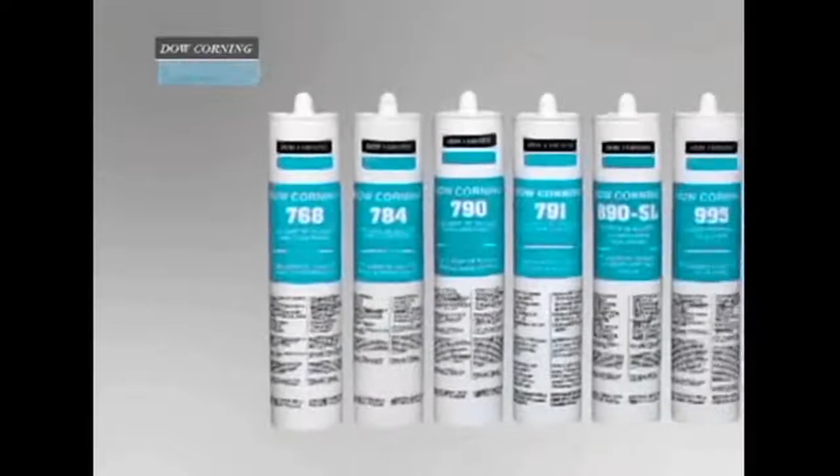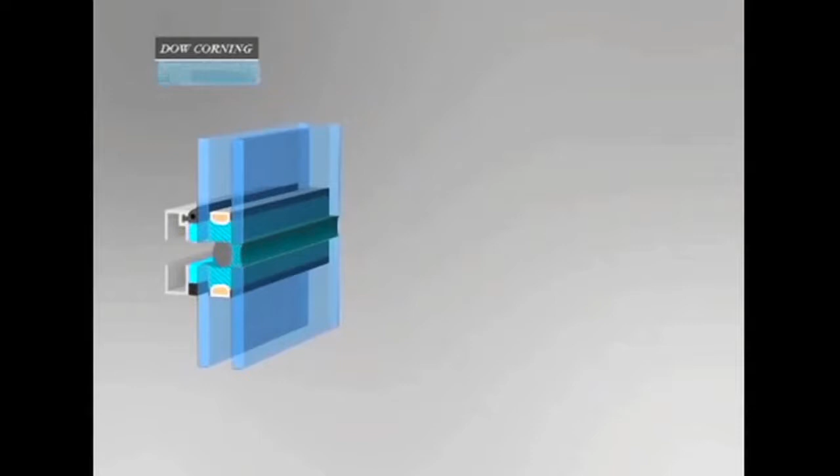Apart from structural silicone, Dow Corning provides an entire range of sealants for many applications. In the construction building industry, sealants for structural glazing or metal panels are the most modern trend, enabling safe and aesthetically pleasing architectural solutions. Dow Corning has therefore created a systematic approach based on domestic and international standards for structural glazing systems.

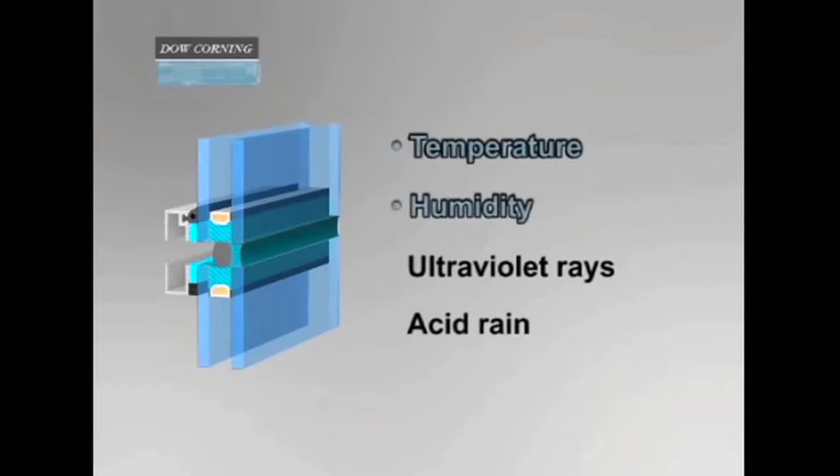Structural silicone sealants must be able to withstand all possible panel movements. They must also be weatherproof.

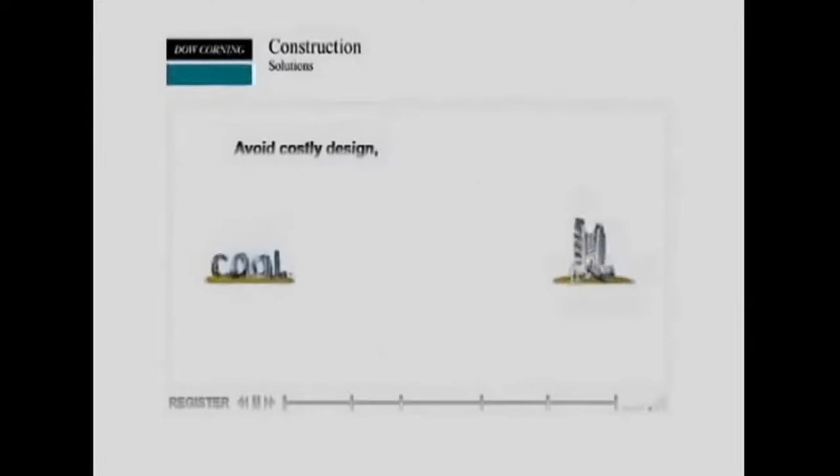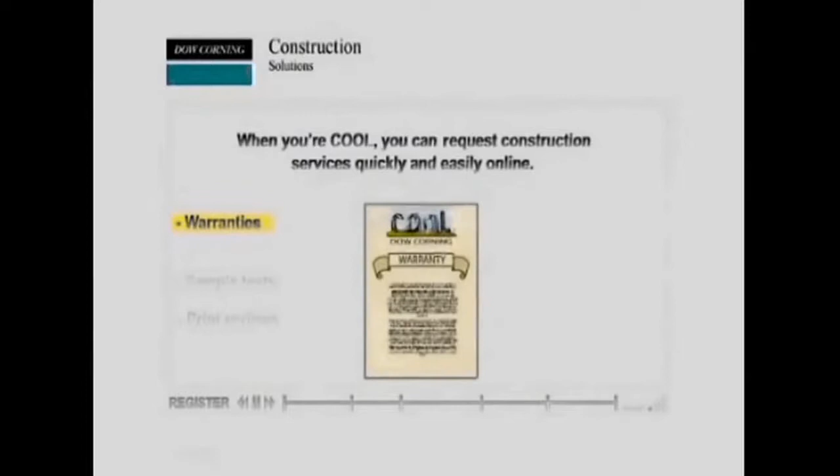Dow Corning, as we continue to innovate, has created COOL, a tool that brings together our global support services and makes sure that each customer interaction with Dow Corning is unique. This innovative internet tool simplifies project management, when possible, making it quick and easy to perform revisions, request sample tests, and warranties.

The first step in the process is to calculate the dimensions of the structural silicone sealant joint by keying information into COOL.

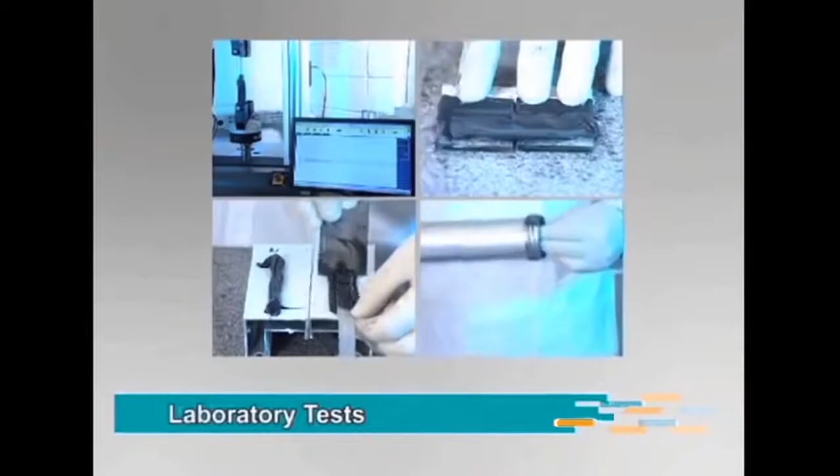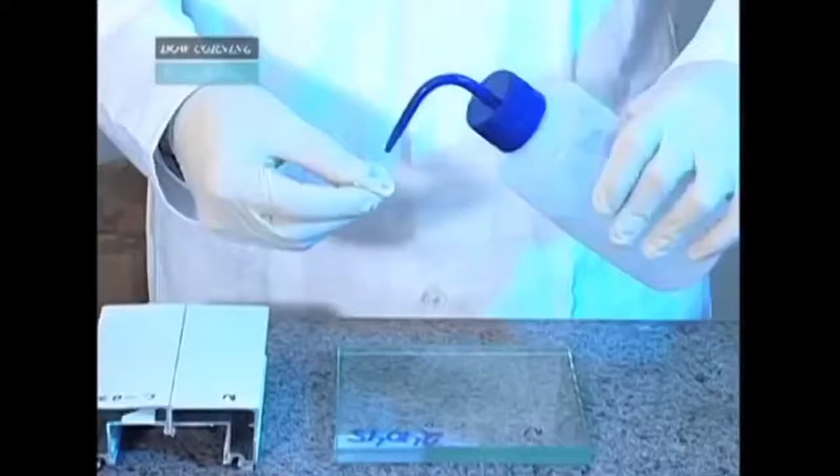The next step is to perform laboratory tests. 3 samples of each type of material to be used on the building must be supplied. The samples must be sent directly to the laboratory after being registered in COOL.

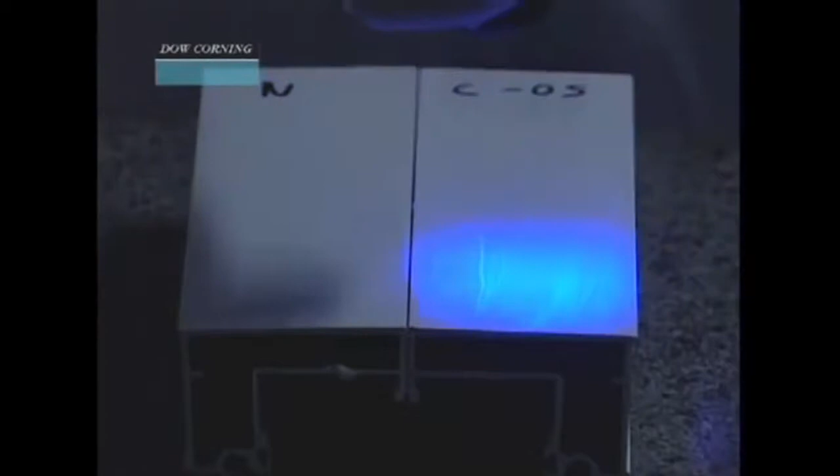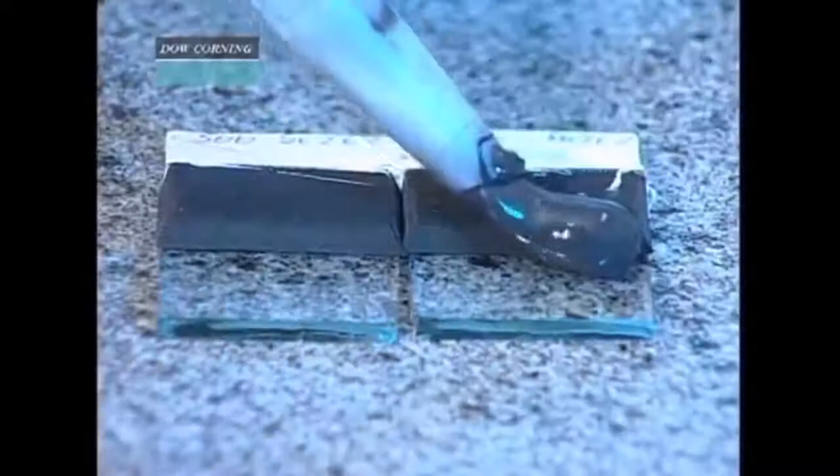Dow Corning evaluates the adhesion of the sealants using a peel adhesion test. This test will identify the best solvent for cleaning each substrate and whether a primer needs to be used. The test takes 3 weeks to complete once the samples have been received per industry standards.

Another test performed is for compatibility. Chemically incompatible glazing accessories may cause discoloration of the sealant and/or loss of adhesion to the substrate. This test takes 4 weeks to complete once the samples have been received per industry standards.

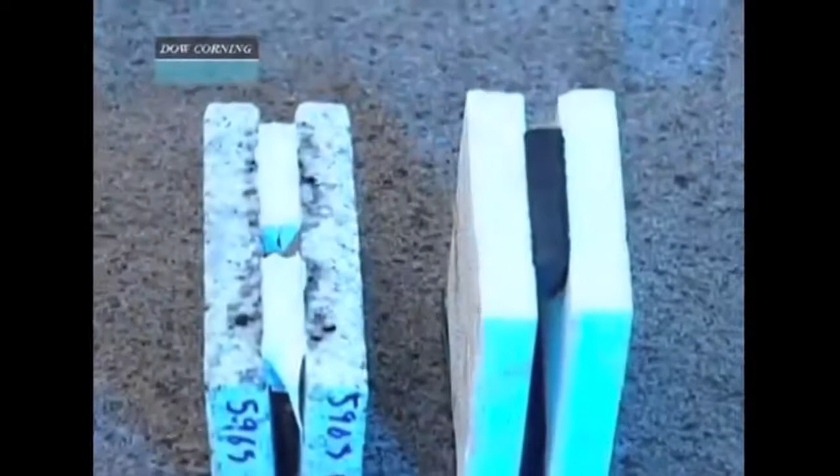If natural stone is used in the project, Dow Corning may test and evaluate the performance of its sealants to determine whether the sealant fluid can migrate into these substrates. This test takes 6 weeks to complete once the samples have been received per industry standards.

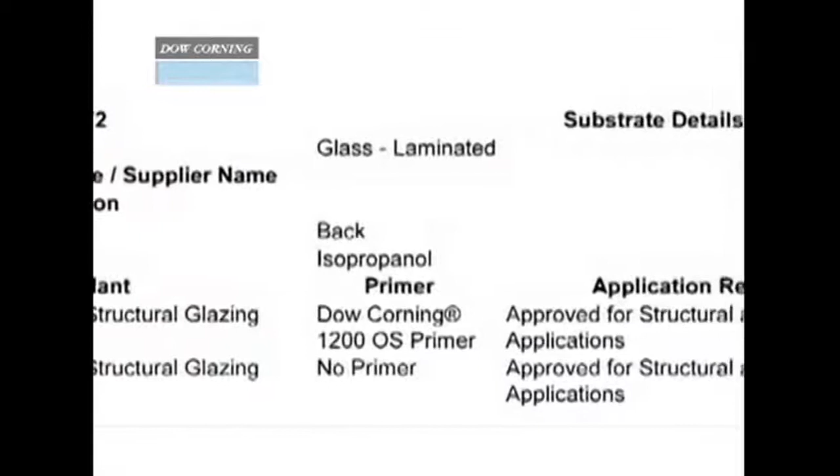Once the tests have been completed and the results delivered, the customer may begin the phase of applying the structural sealant. Important point: glazing may only begin after delivery of the Dow Corning report containing all the completed test results.

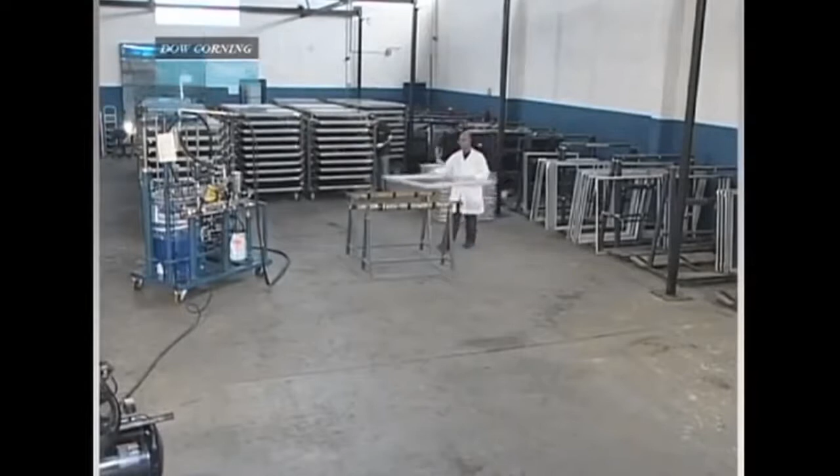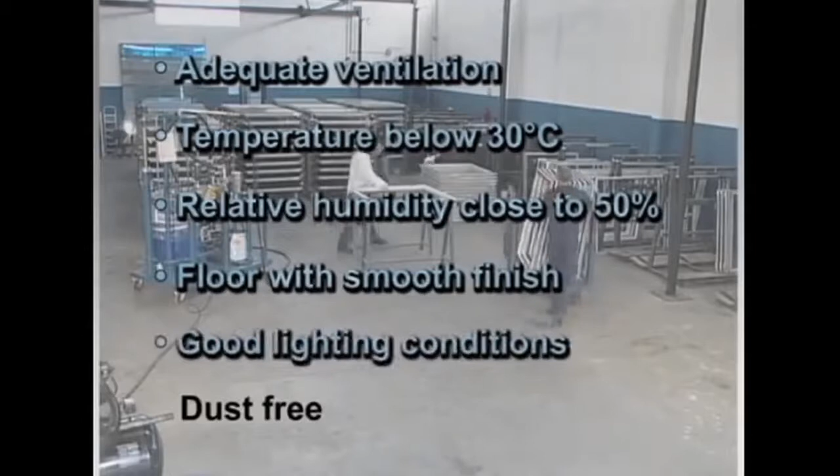Read the product safety sheet before beginning application of the structural sealant. It contains all the necessary procedures, personal protective equipment, and storage conditions for the products to ensure safe work. The location where structural glazing is to be performed must be reserved for the application of silicone.

To begin the process of applying structural sealant, the first step is to clean the aluminum frame with the solvent indicated in the laboratory test result report, using a 2-cloth cleaning method.

If a primer is needed, apply after cleaning. The primer must be applied evenly and sparingly, covering the entire perimeter of the substrate, and you must wait 30 minutes for the surface to be ready for sealant application.

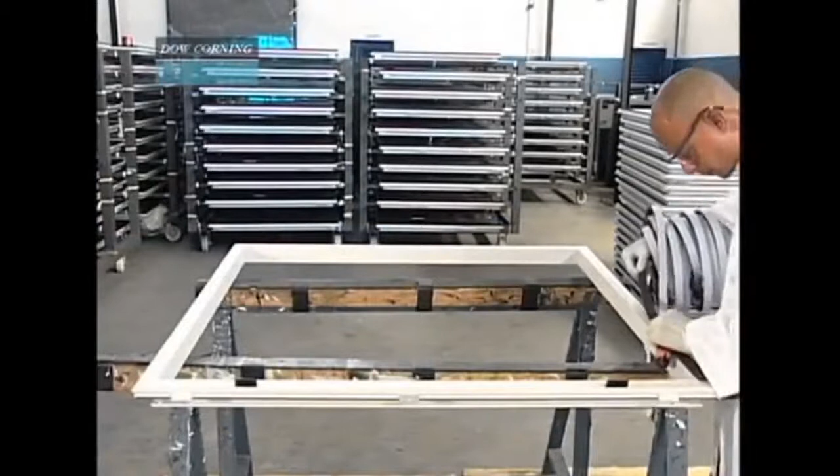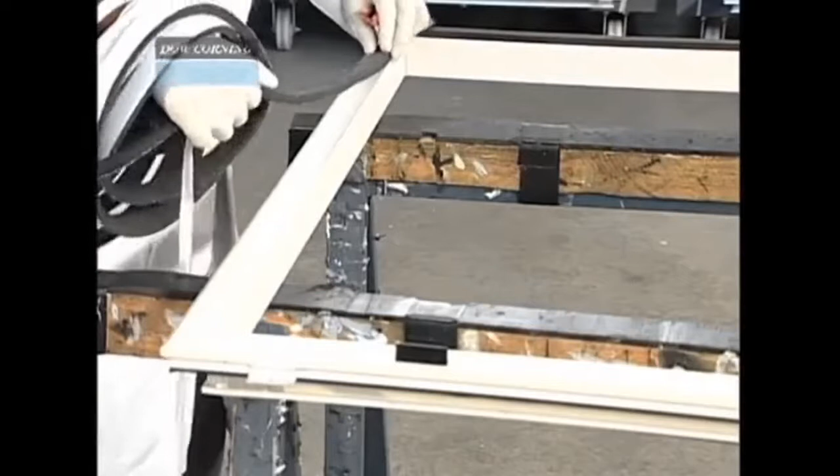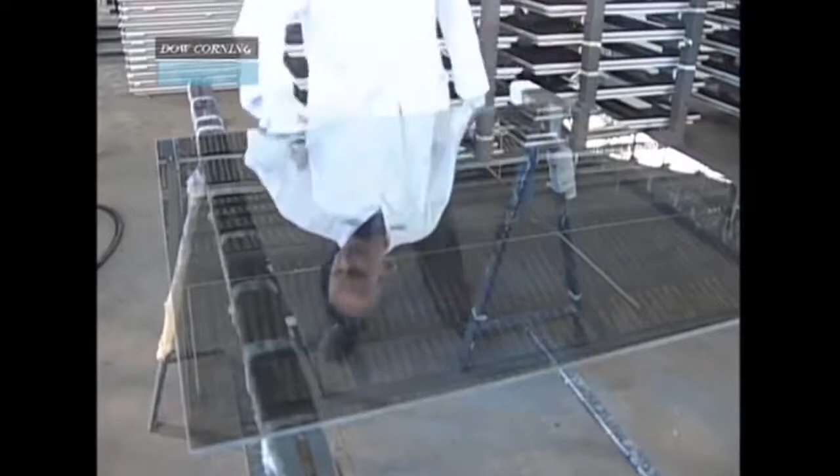Next, place polyethylene spacers or gaskets on the entire surface of the frame in order to support the glass and define the area of the structural silicone joint. This spacer may be mono or bi-adhesive, provided it is made of a material that has previously been tested and approved by Dow Corning. Once the spacer has been applied, the glass must be cleaned using the solvent indicated in the laboratory test result report, applying it with a lint-free cloth.

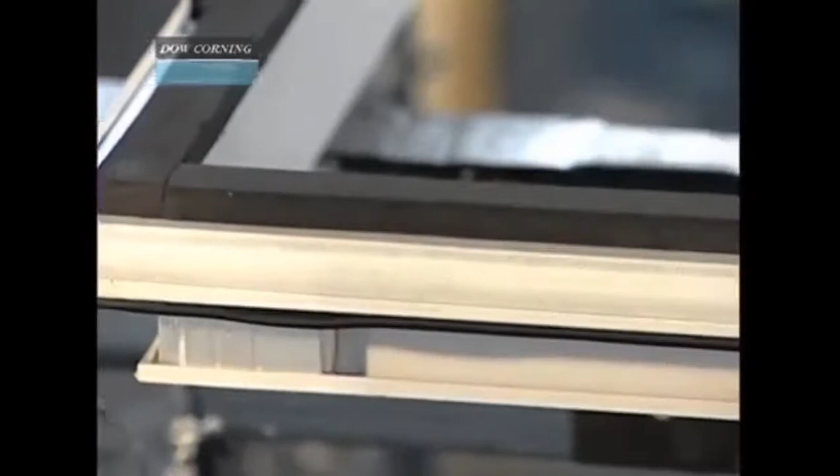Cleaning must be very thorough to remove all residues. Following this step, and before the solvent evaporates, wipe with a clean, dry cloth to make sure excess solvent is removed.

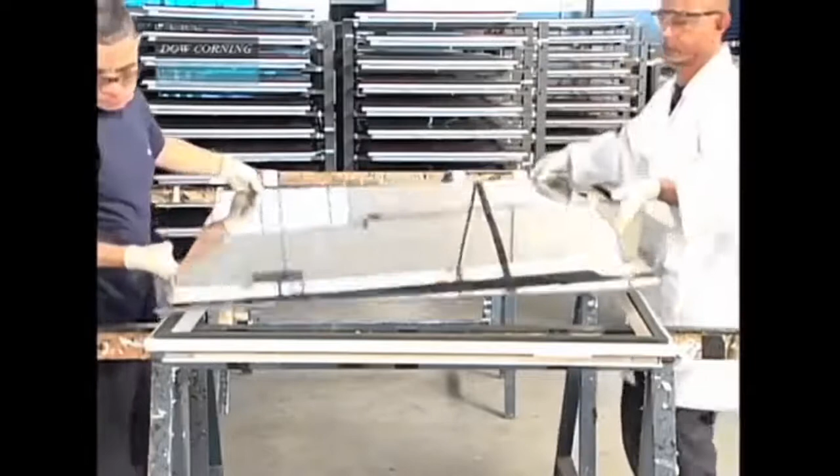Use masking tape to protect the area lying next to the location to be filled with structural silicone. Any excess silicone will be spread on top of the masking tape rather than on the aluminum.

After the substrates have been prepared, the glass can be rested upon the aluminum frame. Precision is fundamental in this step because the glass and aluminum must be perfectly aligned in the frame.

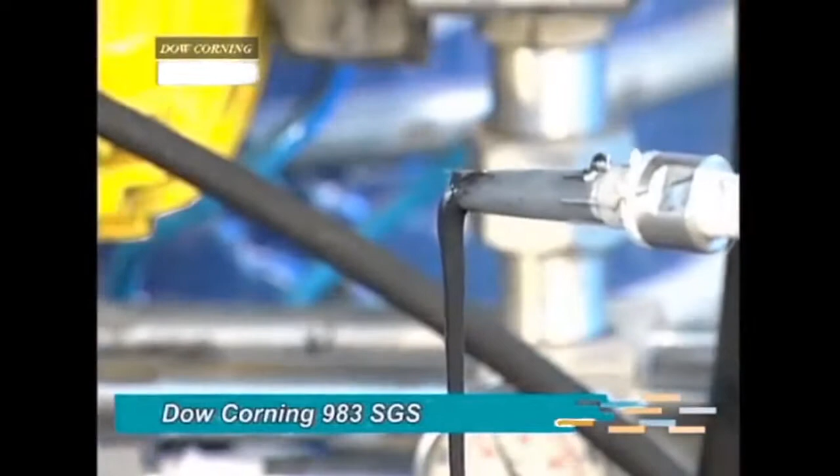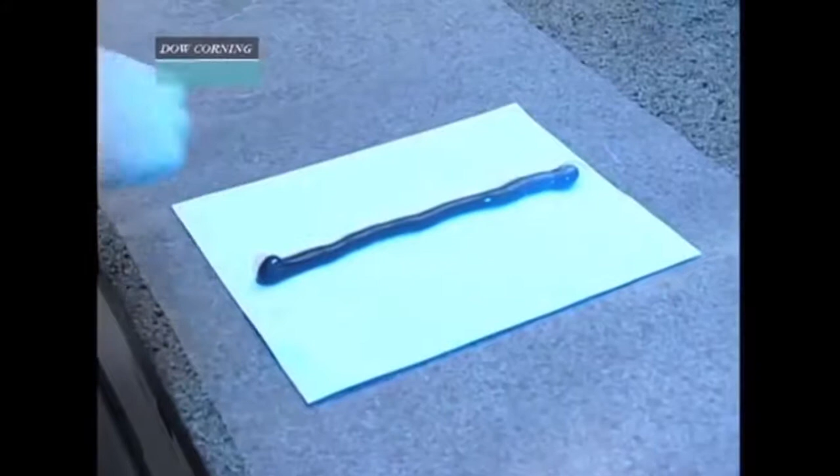3 types of tests are carried out before bonding if a 2-part silicone is to be used. The first is a mixing test known as a butterfly test. A bead of sealant of at least 15 centimeters is applied to a sheet of white paper, which is folded in half and squeezed until the sealant spreads.

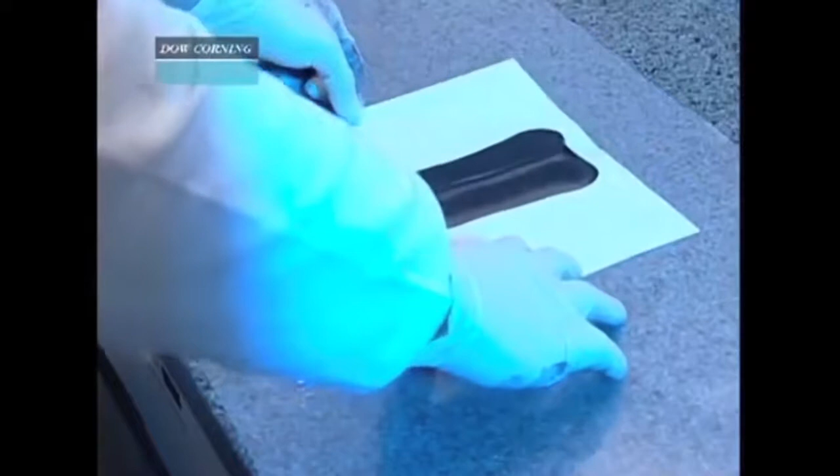When the sheet is pulled open again, the stain must be even in color. If it is uneven, more sealant must be purged and the operation repeated until the expected result is achieved.

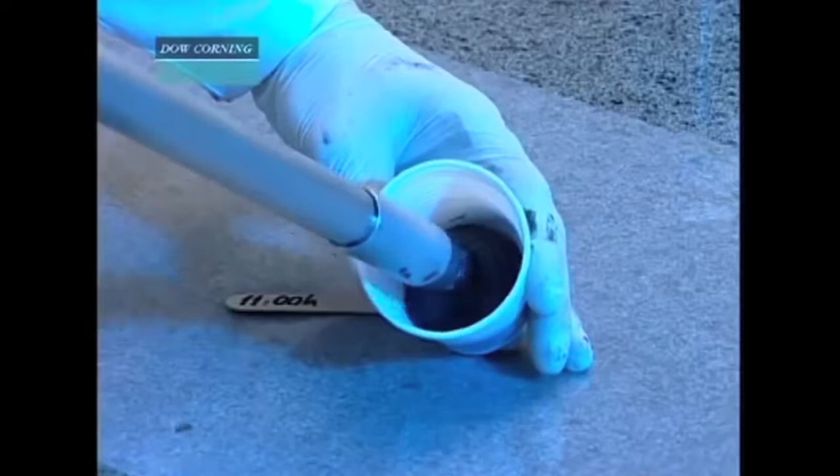The second is a cure time test, also known as the cup test. Sealant is poured into a plastic cup and a wooden stick is placed into the sealant. Pull out the stick every 5 minutes and make a record of the time.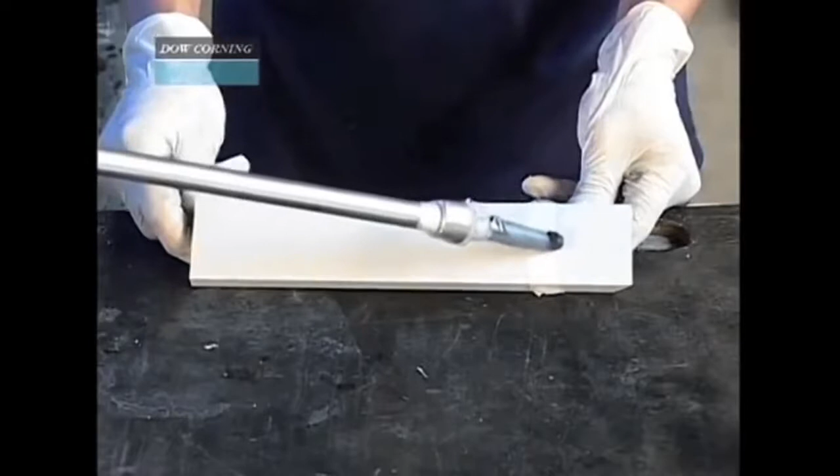Then there is the adhesion test. Clean the surface of a sample of the aluminum to be used in the project with the solvent indicated in the report and apply the primer if specified. Lay down a strip of masking tape transversely and then put down a bead of sealant approximately 20 centimeters long, making sure it passes over the tape.

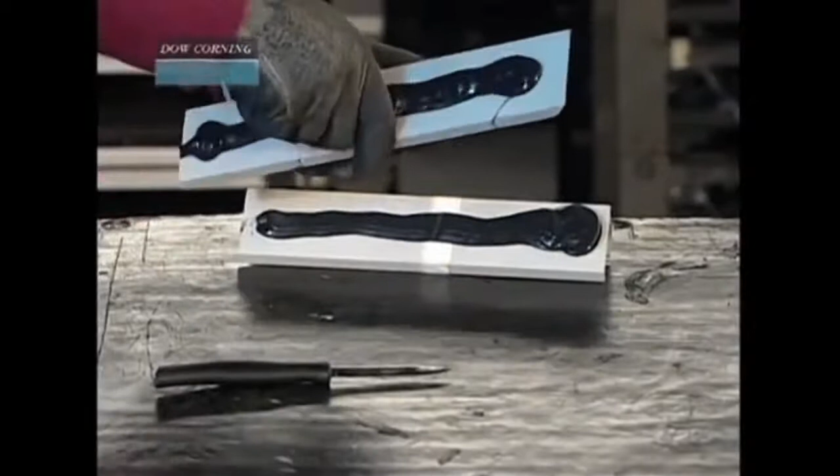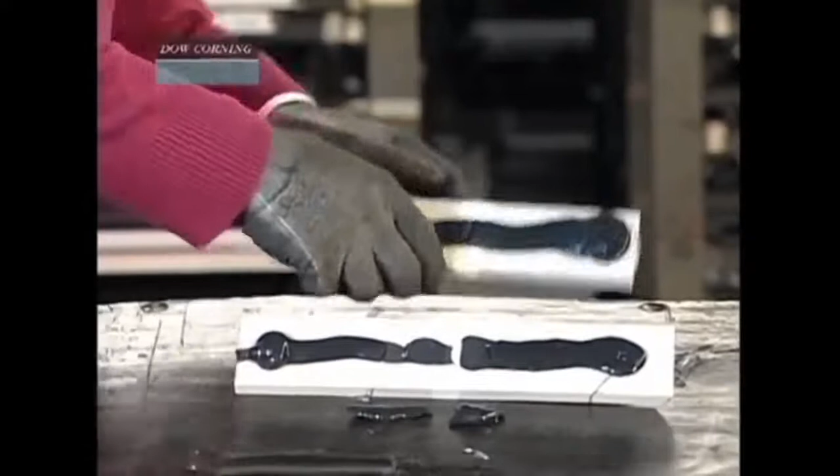After the sealant has cured, pull the tape perpendicular to the substrate to see whether there is any adhesive failure. If the bead of sealant does not show adhesion to the substrate, the batch must be rejected. This test is to be performed at the end of each production batch.

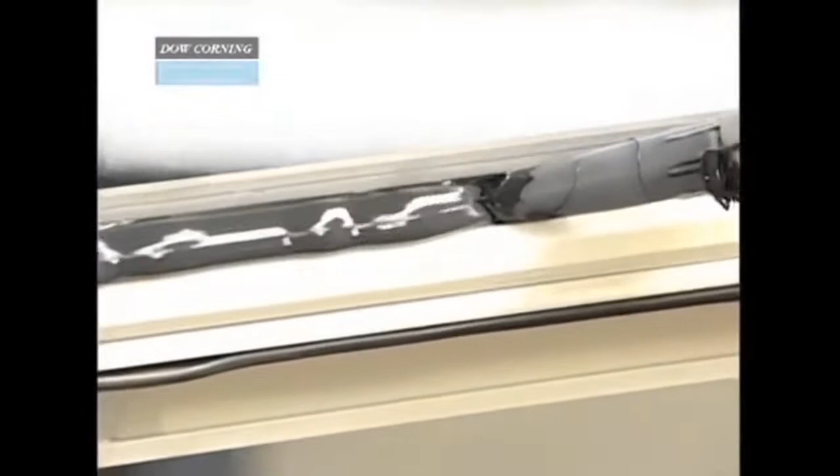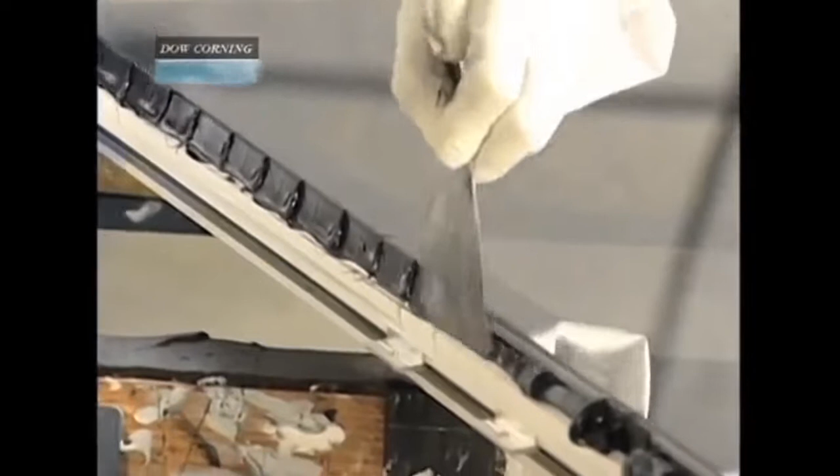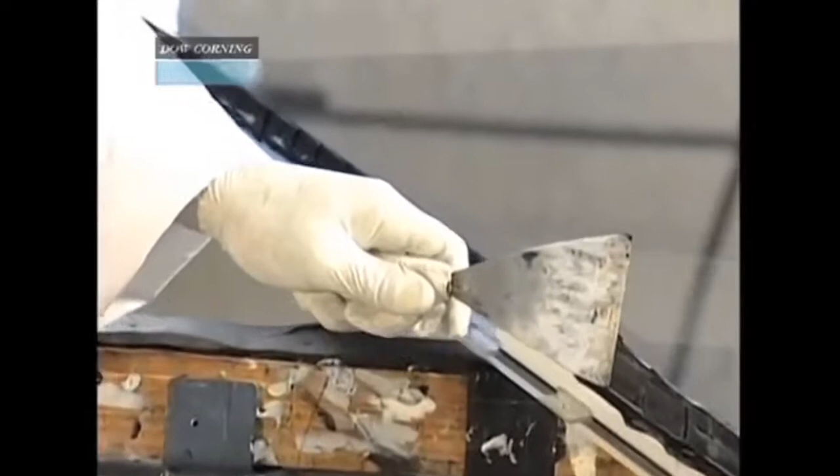The structural silicone can now be applied all around the perimeter of the frame. The application and finishing processes are the same for both 1-part and 2-part sealants. After application, the silicone must be spread inwards using a spatula, forcing the silicone into the joint.

For finishing, hold the spatula at 45 degrees to the edge of the frame. After spreading by spatula, remove the masking tape to remove excess silicone.

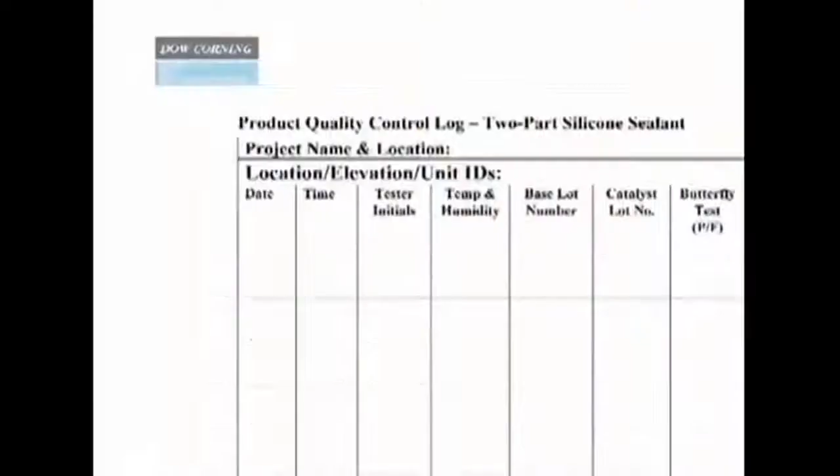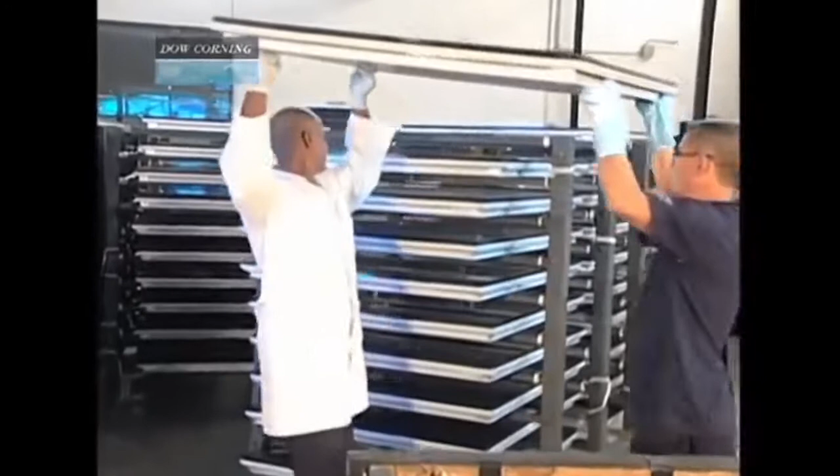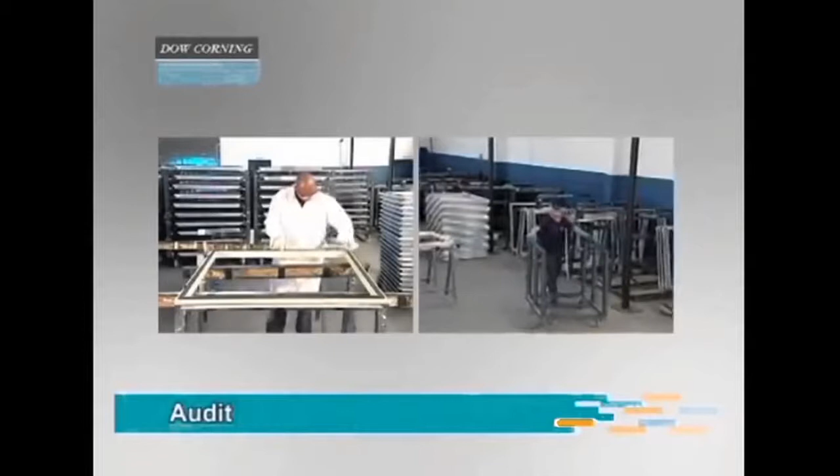Until the complete adhesion of the sealant is obtained, the frames must be stabilized in horizontal position using a drawer-type rack to keep the frames separate from each other.

Quality control is the responsibility of the frame manufacturer. A technical expert or person trained by Dow Corning will conduct periodical audits of this control, evaluating the tests performed and the bonded frames.

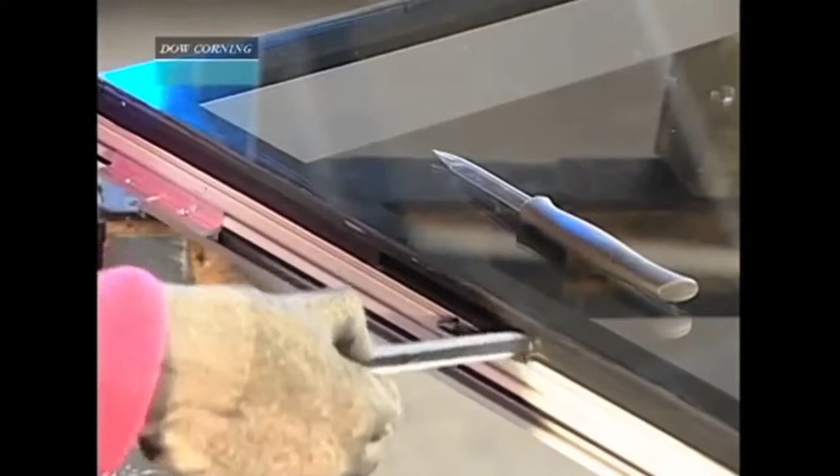An adhesion test, the post-cure test, is performed on 10% of glazing units. The test consists of cutting approximately 10 centimeters of the join lengthwise, and then the sealant is pulled at a 90-degree angle to the frame.

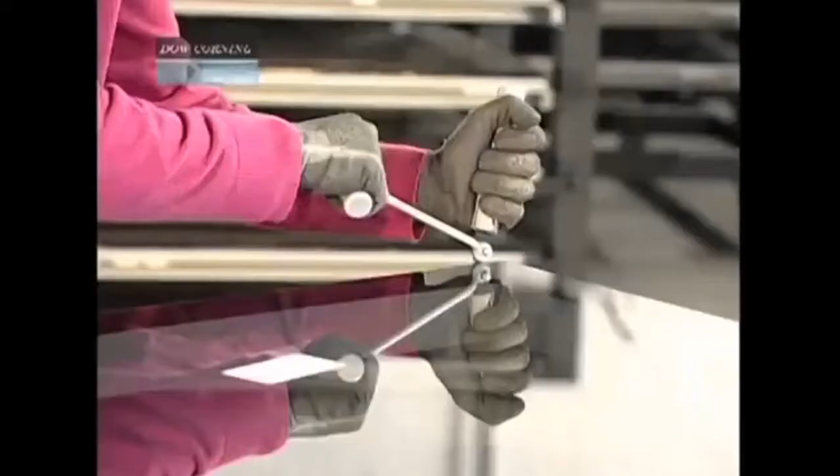This test examines the adhesion of the silicone, its elasticity, the presence of bubbles, the dimensions of the join, and the cure of the sealant. If the joint is not completely cured, the frame cannot be installed.

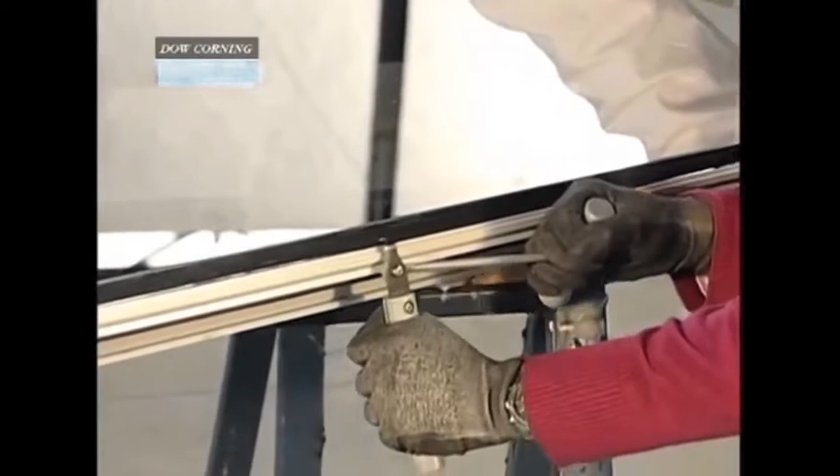Another essential test for assuring system quality is deglazing. A knife or steel strip is used in order to cut all the sealant close to the glass. The glass is removed and the dimensions and filling of the joint, adhesion, and cleanliness are assessed.

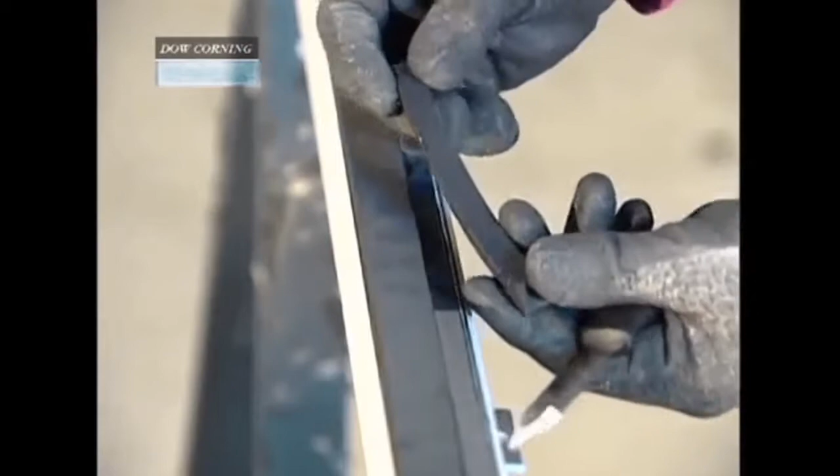This test checks the conditions of the structural bonding after the sealant has completely cured, and the compliance of all the following steps can be seen.

A daily report containing the exact number of glazed units and their positions must be provided to the technical expert. Test samples are identified by building and by date of bonding.

So you got an opportunity to go through the video, which essentially talks about the various quality control checks of the other applications related to facade like insulating glass and weather seal.

So the first thing which has to be done is the design review. The design has to be reviewed and the recommendation has to be made on how much silicone has to be used for a structural, insulating and weather seal application.

The sealant manufacturer should be approached for giving this review, and all the other substrates which are coming in contact with silicone also has to be approved prior to use.

You would have seen in the video how the peel adhesion testing is done. The testing is essentially done in a dry condition on a job site, whereas when it is done in the manufacturer's laboratory, it is done to ASTM standard, which talks about doing test in dry condition as well as in wet conditions. So it is essential that the project samples are tested for getting a good bonding, and the recommendations are made prior to the start of the project.

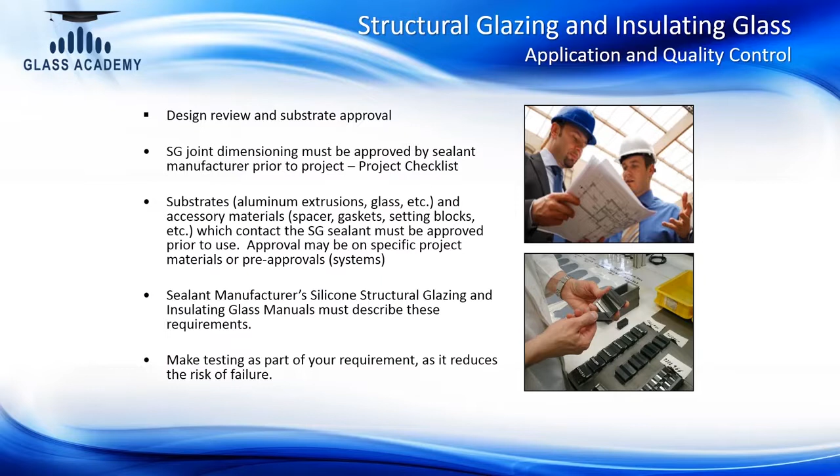So, to summarize, the design review must be done first: reviewing the design and recommending how much silicone has to be used for structural, insulating and weather seal applications.

The sealant manufacturer should be approached for giving this review, and all the other substrates which come in contact with silicone also have to be approved prior to use. You would have seen in the video how the peel adhesion testing is done. The testing is essentially done in a dry condition on a job site, whereas when it is done in the manufacturer's laboratory, it is done to ASTM standard, which talks about doing tests in dry condition as well as in wet conditions. So it is essential that the project samples are tested for getting a good bonding, and the recommendations are made prior to the start of the project.

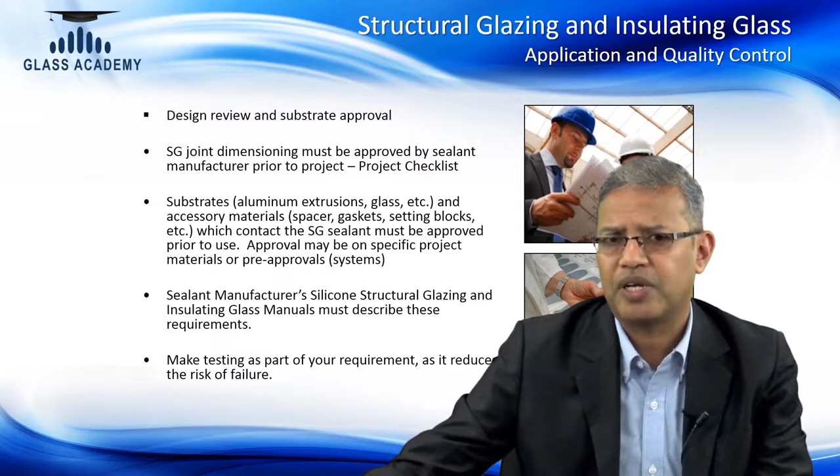So you saw this particular testing, which is an adhesion test. I have always been saying that the single most important property for silicone in facade application is bonding. To get to that good bonding, depending upon the substrate, sometimes you need a primer, or you need not have a primer to be used. This can be checked by doing the adhesion testing.

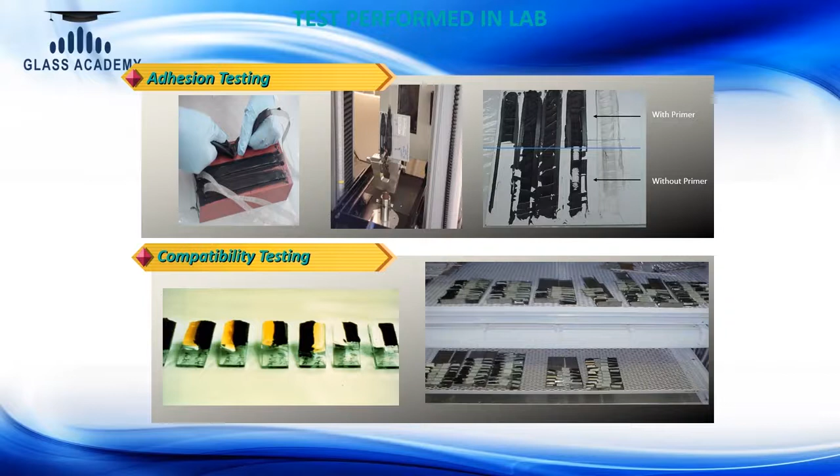Also, the nature of failure for sealant bonding is always cohesive. So a layer of silicone should always be stuck to the substrate. It should not come out clean like a tape or a gasket or a dry fix system which does not leave any trace, whereas silicone mechanically or chemically bonds to the substrate, and then when you pull it, it tears within itself and does not leave the substrate, which is called good bonding.

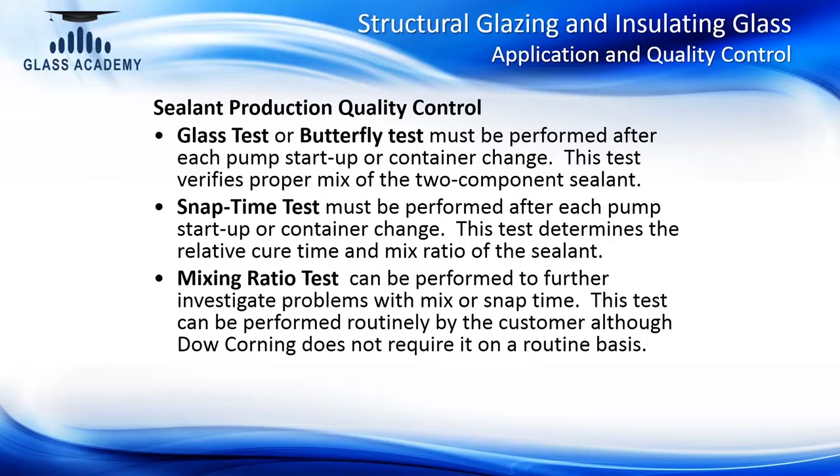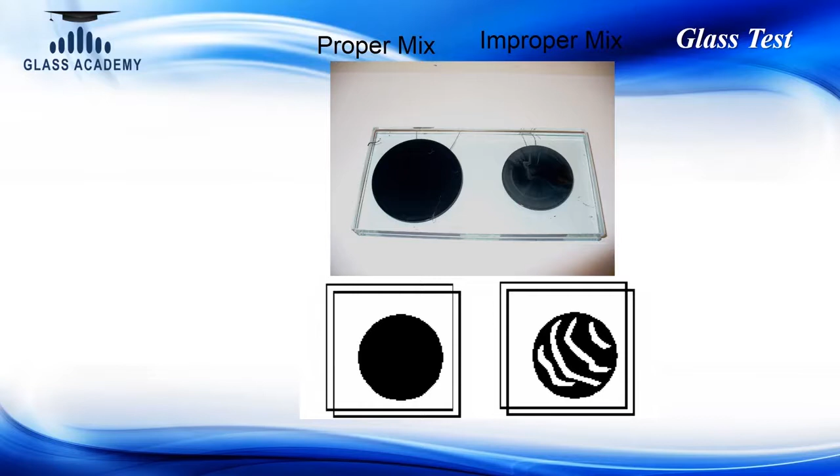Also, essentially what is important to understand is any accessory coming in contact with silicone should not really affect the performance of the silicone, and this can be checked through a weathering study test, again as per ASTM C1087. So wherein any discoloration is noticed, that particular accessory is not suitable to be used in contact with silicone.

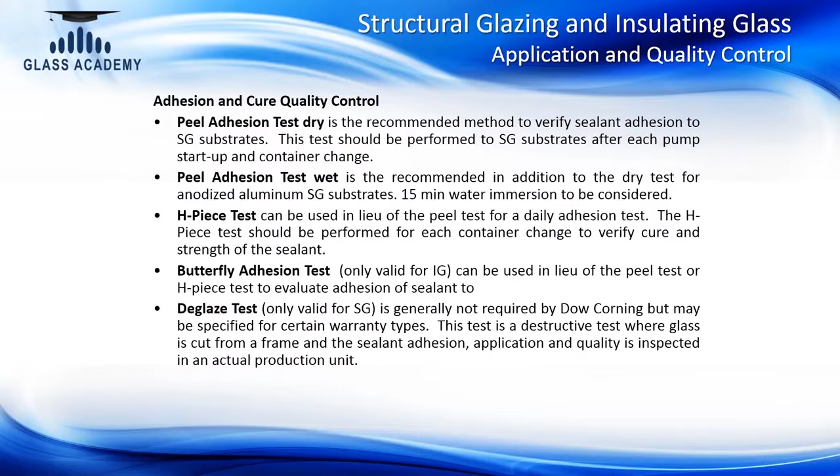Also, the other test is in terms of checking the staining, because if you remember on the ingredient part, I talked to you about a particular chemical like plasticizer which is added, which migrates into porous substrates or onto non-porous substrates, causing bleeding or staining in porous ones. This can be checked by doing a staining test as per ASTM C1248, wherein a joint is 50% compressed and put in an oven, and then after 14 days of testing, you can see whether there is any migration of fluid into the stone.

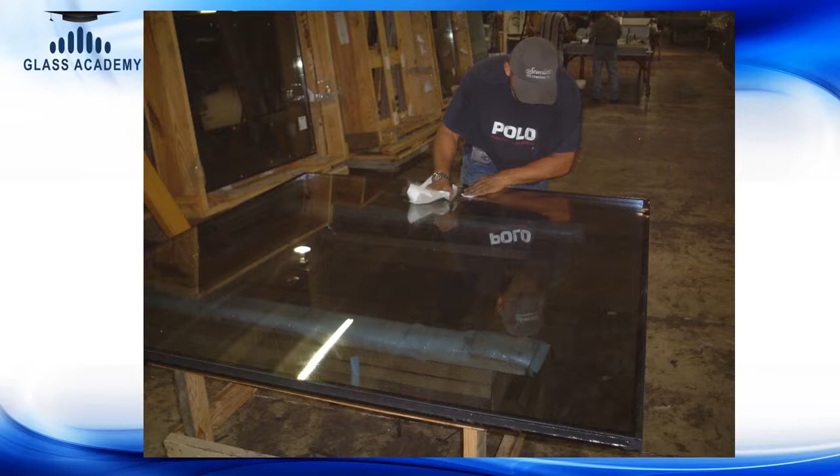Also, what is critical to understand is silicone sealants are chemicals. This has to be stored under a particular temperature, and also every sealant would have a batch number mentioned on the product, along with the storage temperature, and it has to always be stored within that range. So it is good to have a system like FIFO, first in first out, in your factory. Also, it is important that the product is always stored below its stated recommendations, like temperature as well as a good humidity-controlled atmosphere. Otherwise, the shelf life mentioned on the product is of no use if you are storing it at a high temperature or exposing it to higher humidities.

The way two-component sealants are tested for mix quality is the snap time, which you have seen in the video. The same thing applies with one-component sealants. You have to do a quality check by taking a small amount of silicone, putting it on a polyethylene sheet, and then making a small drawdown. When you make a drawdown, initially when you touch it, you will find it coming onto your fingers. After some time, when you touch it, nothing will come onto your fingers. That means there is a skin formation which happens on top of the sealant layer, which shows that the product is curing properly. This is one test which has to be done for a single-component sealant, so prior to use, you know whether the product has been stored properly, otherwise this will affect the curing rate of the sealant.

So we saw in the two-part system what temperature has to be maintained, what humidity level, and how the glazing room was maintained.

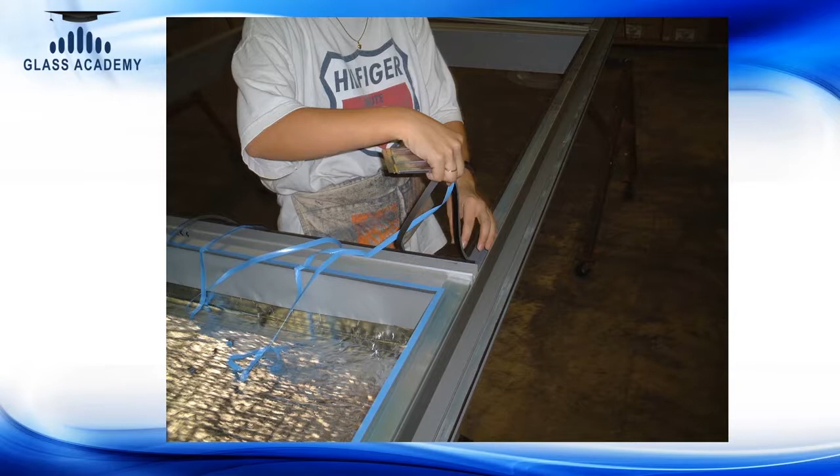The butterfly adhesion test is one important test which has to be followed for IG. You take a small 1 foot by 1 foot glass with spacers, put in the primary seal, apply secondary seal only on one side of the four sides, and after 1 day you just open it like a book, 180 degrees, and see that the silicone is not leaving the spacer and the glass.

You can see the silicone gets completely stretched, so that's good adhesion. And the deglazing test - you would have seen the glass getting cut and removed from the frame for the structural glazing - wherein you can check the bite, how much width, the nature of cure, bubbles, any mixing issues, or also the adhesion.

This is the peel testing, just showing you - this would have been seen in the video. This is the butterfly adhesion test. You can see either side - you can keep one side and then open it like a book and check the sealant application.

You saw the way the sealant is applied. What is important is cleaning. Cleaning is very critical - cleaning does not replace, priming does not replace the cleaning. Prime if required, then put the spacer tape, then keep the glass and apply the sealant, or before that you put the masking tape.

In case of DGU, the glass gets cleaned automatically by the line, so no need for any additional cleaning, but the spacer has to be cleaned with a solvent to get good silicone bonding to the spacer. This is just to show you cleaning, tape, silicone application, inspection, and then quality check by cutting the silicone. What you need is a good cohesive failure, as you would have seen in the video.

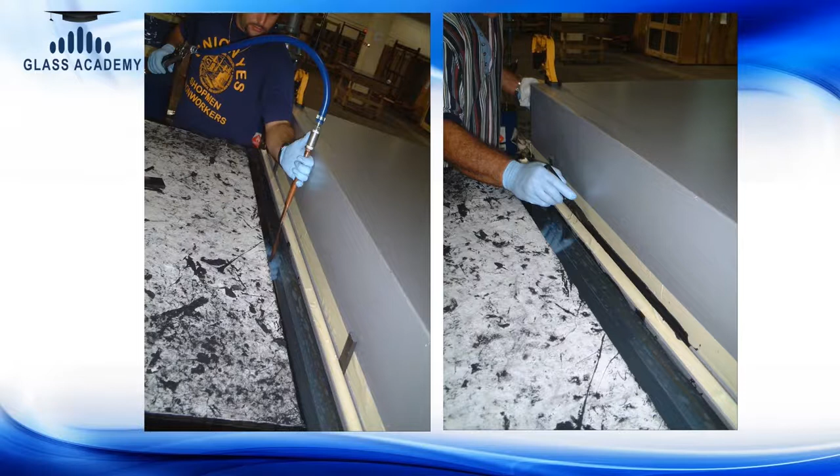The structural integrity for the whole unit comes from the secondary silicone sealant applied here, and the amount of silicone to be applied is always calculated from the middle of the spacer to the edge of the glass. This is called the secondary seal depth, and it is calculated using a similar formula to what we have seen for the structural bite.

It's critical to understand the function of the spacer and desiccant, which is to absorb moisture in the air to keep it dry. If there is some migration, it keeps moisture completely absorbed so there is good visibility achieved inside the unit. The butyl is essentially impermeable to moisture and inert, while the secondary seal is a structural capable product which holds the units together.

You would have seen the advantage of insulating glass in getting very good thermal insulation properties. What is critical is, if you do not have a proper secondary seal applied with proper design, any load coming onto this will pass on to the primary seal. The primary seal cannot take loads and will fail, resulting in fogging of the units or even failure of the whole unit.

Every product has its own function, but the structural integrity comes from the secondary silicone seal. Studies have proven that such a dual system, using a primary seal of butyl and secondary seal of silicone, gives a very good life for DGUs in any climate. A climate like ours is much more prone to parameters like humidity, UV, sunlight, or weathering compared to many cold climates outside India.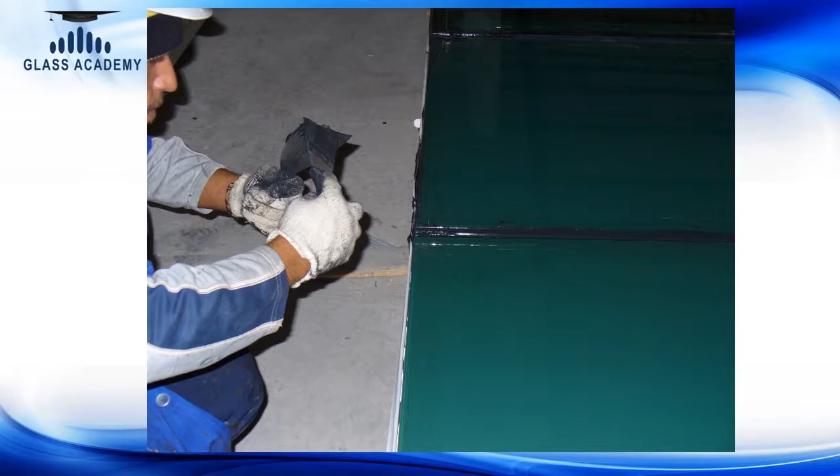What is important is also during the production of these units, you would have seen in the video that they showed you the documentations. So documentation in terms of quality checks is essential to be mentioned in logbooks or through separate records, both for structural glazing as well as for insulating glass, and this needs to be used for getting a warranty from the manufacturer.

One more thing I want to touch upon, which is essential to understand between site and factory, is that if you are doing any application at site, kindly ensure there is proper safety in place, and also that essential climatic conditions like dust, dirt and temperature are taken care of during sealant applications. If you apply silicone on a hot surface, the byproduct is released immediately on the surface, leading to premature failure. Also when sealing a side joint, you should have a proper safety mechanism so you are able to nicely move around and apply silicone. There are also some kits available with 2-part cartridges for fast curing site applications.

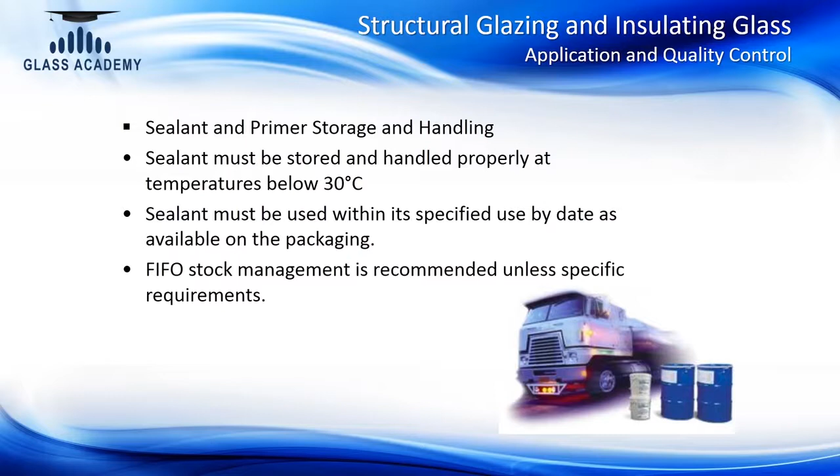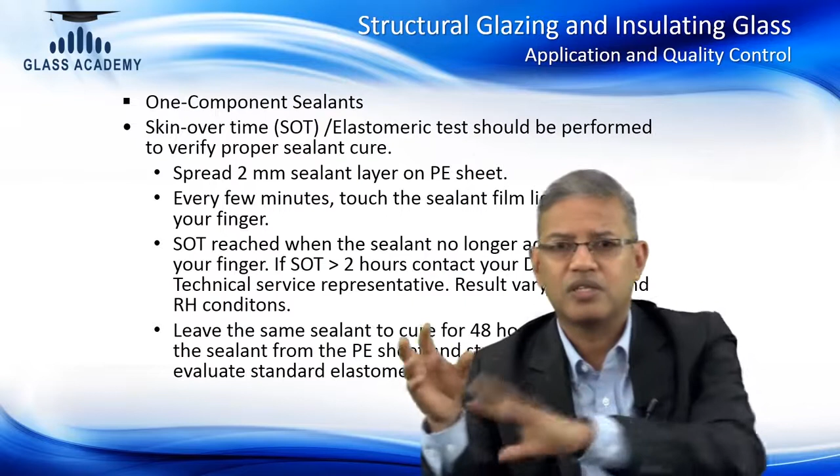There was another study done with an independent laboratory in Germany, BAM, where they developed equipment simulating movement, with one cycle equivalent to one year of life. A joint was made and subjected to movement, shear, tensile, compression, and weathering. All combined, if it withstands one cycle, that's equal to one year. Some products tested from proven companies like Dow showed that after 52 cycles, the product still had remaining good life, showing it has already met the 50 years of life expectancy.

The product can also be extended for use in different applications other than glass. One growing segment is bonding fiber cement board, thin stone tile, or high pressure laminate to the facade area to create rear ventilated facade systems, or on opaque areas like drywall systems, giving both performance and significant aesthetics.

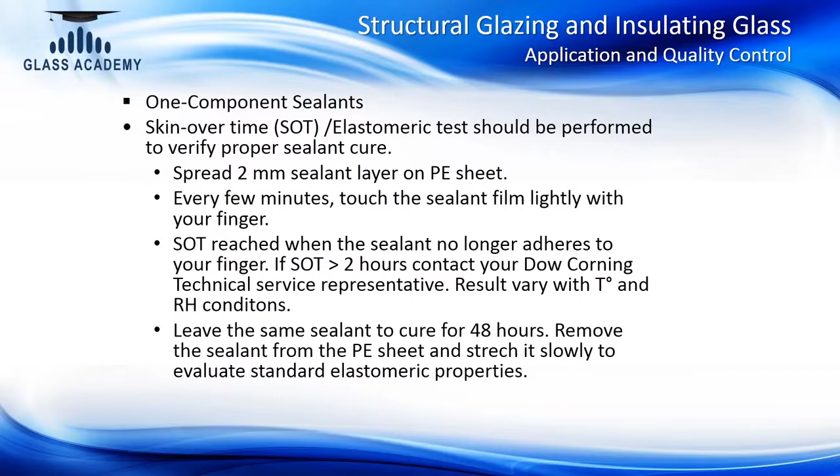Silicone can be used to give the feel of glass, with no mechanical fixing required from outside. You can go to any height by doing a semi-unitized or patch system, which gives the confidence of doing these applications at any height.

The sealant is also a proven technology which we've been using for 45 years. So this is a material which has already been working.

For interiors like mirrors or lacquered glass, these products have also been used, and there are many case histories available with proven products that have high green strength, giving an advantage for site bonding applications where quality is also properly taken care of.

Silicone is inherently inorganic, which gives excellent fire resistant properties. This means it can also be used as a fire and smoke seal, wherever a slab meets the facade area, where there is going to be an opening.

That joint can be coated on rock wool using a silicone sealant coatable material, so that smoke or fire will not pass through. You achieve certain ratings of 1 or 2 hours so that occupants can escape and will not die because of smoke coming through.

These are life-saving measures, and there are regulations controlling this today. Silicone, as you know, does not propagate fire like organic materials—if you burn a tire, it burns and releases toxic gases. There are many other materials like gaskets that will burn and propagate fire, whereas silicone inherently does not propagate fire, and even if it burns, it forms a white ash, going back to silica.